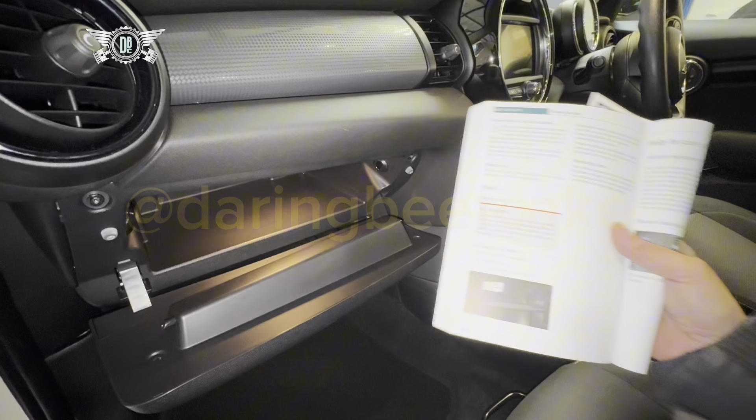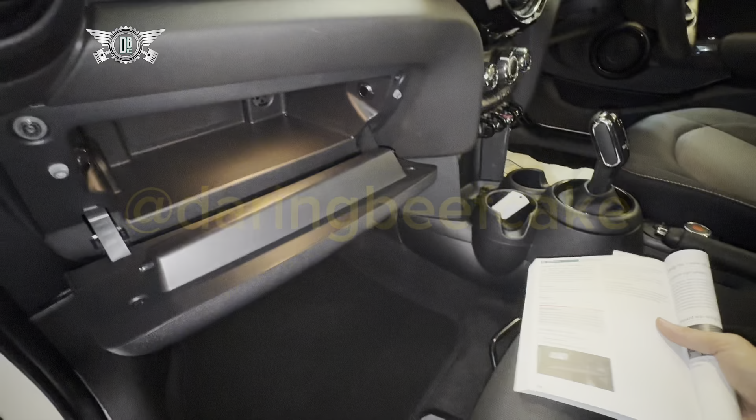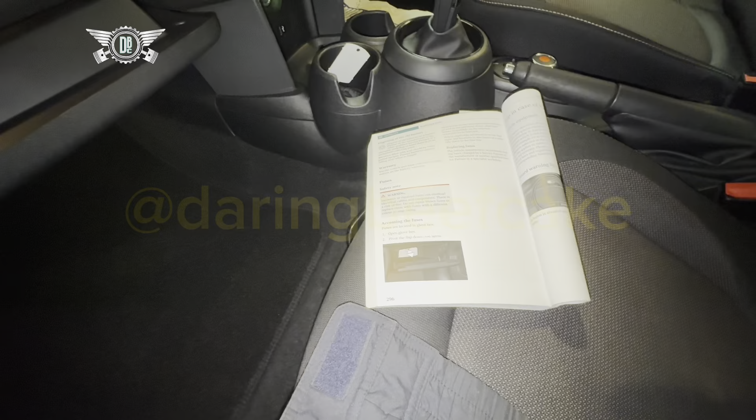In today's video I have this Mini Cooper, a 2019 version, the F56 chassis, F56/F57/F55 I think it is. I'm just going to show you the location of the fuses in this particular car. If you look at your manual, where it says fuses, in this case page 296. By the way, this is a petrol car, a 1.5 automatic, so it may be slightly different from the manual version, or the fuse allocations may be slightly different.

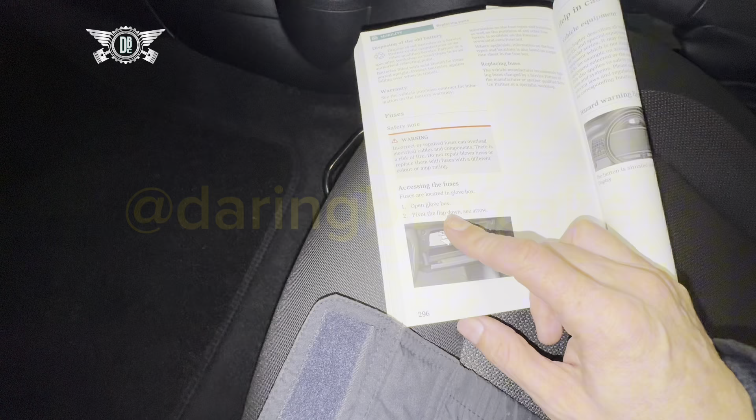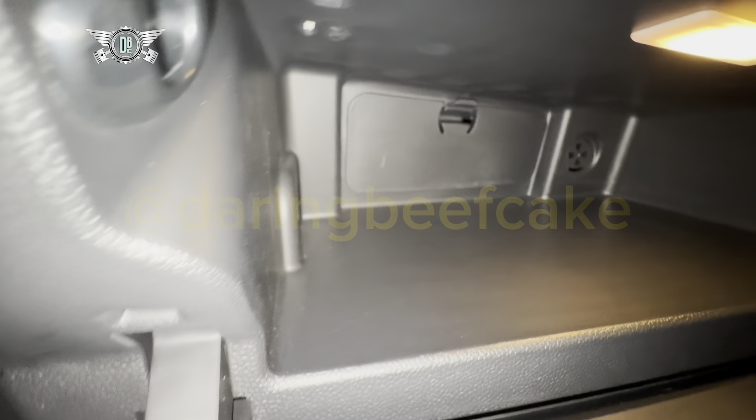So, accessing the fuses: they're located in the glove box. Open the glove box, pivot the flap down. So open the glove box, and there's the little flap. Take the flap out, the little cover, and in there are the fuses.

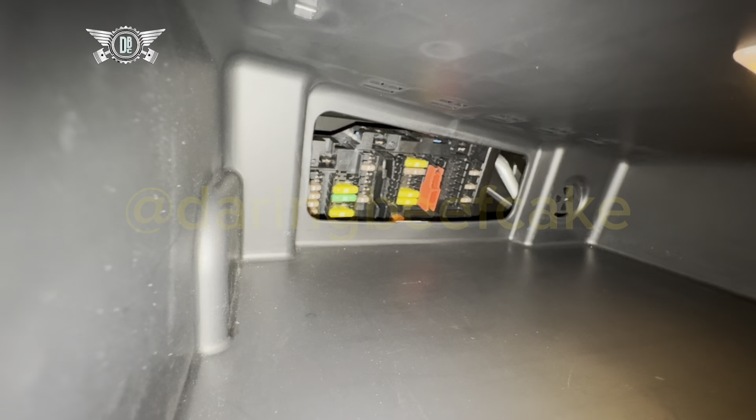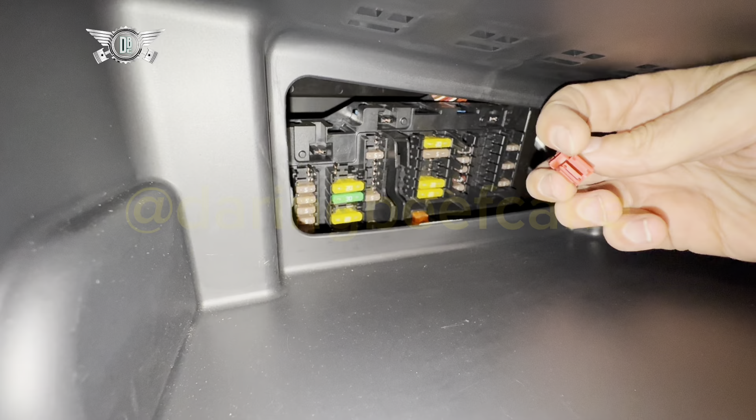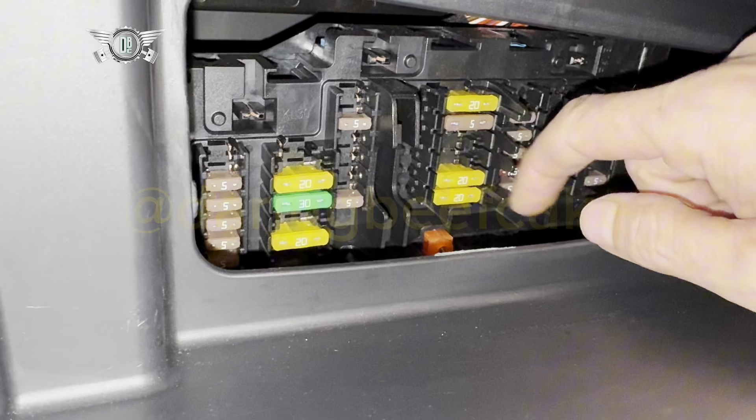And there's also that little key just here, which you can remove. You can use this to take fuses out. The small side here is for small fuses, and the other side is for the bigger fuses. So you have the bigger fuses here and the small ones here and here.

That's like an empty line there. There's some fuses that are not there as well, or here. Now that doesn't mean those fuses are missing, it just means that this car may not have those features. So if the car had electric seats, maybe there would be fuses here or whatever. So don't go putting fuses where there isn't any. It just depends on the car that you have, what fuses you may have.

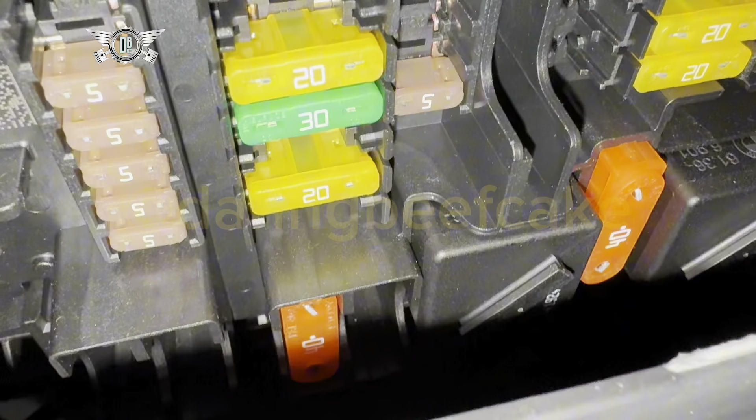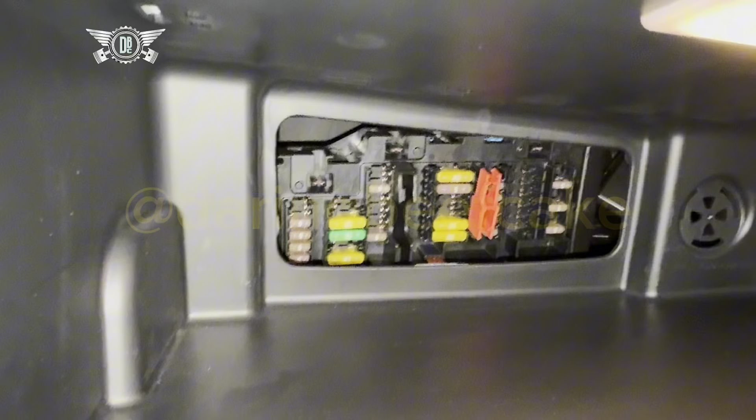There's also some relays down there, you may be able to see. So it's just one of those fuse boxes that BMW fits in the cars. A little bit awkward to get to, but it is what it is.

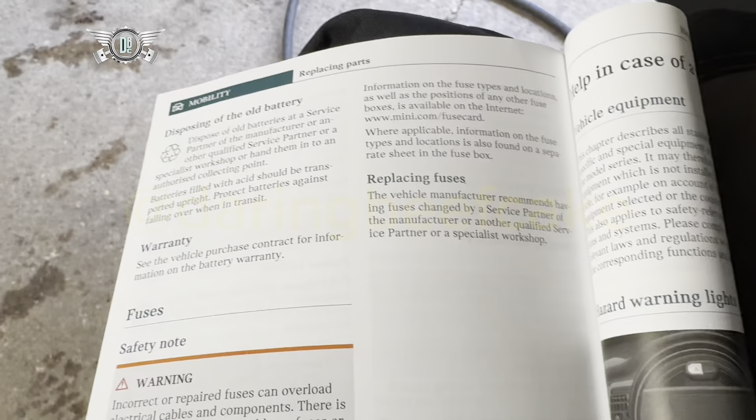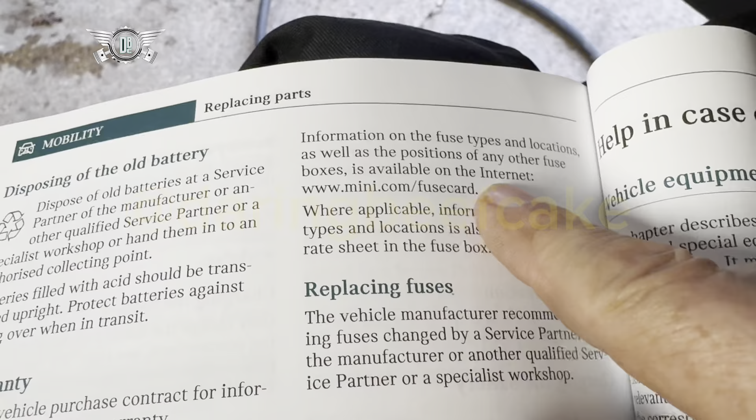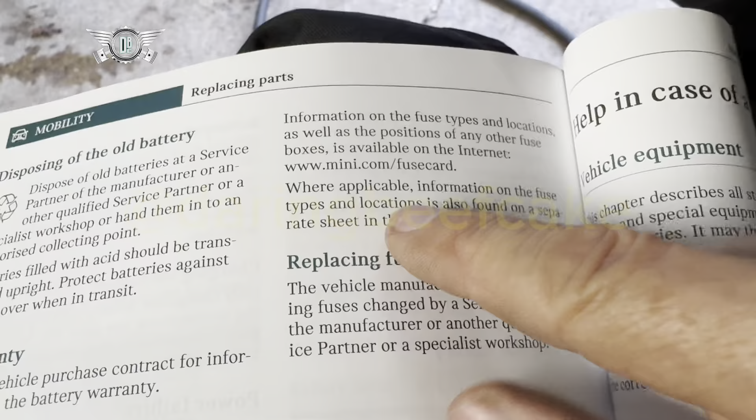And I'm not sure there is a fuse list paper somewhere, I'm gonna have a look. Right, so looking at the manual here, it says information on the fuse types and locations, as well as the position of any other fuse boxes, is available on the internet, at www.mini.com/fusecard. So I'm assuming you would go to that site and look for the Mini F56, and it will show you the fuse box, what the fuses are for, the allocations, the numbering, and the amperage. I'll have to have a look at that, and we'll add it to this video.

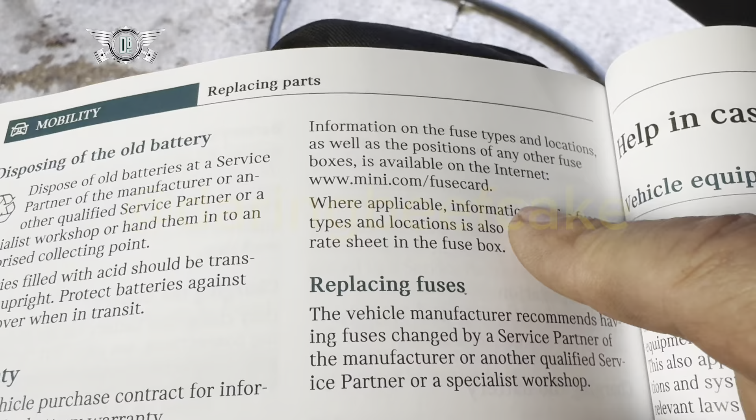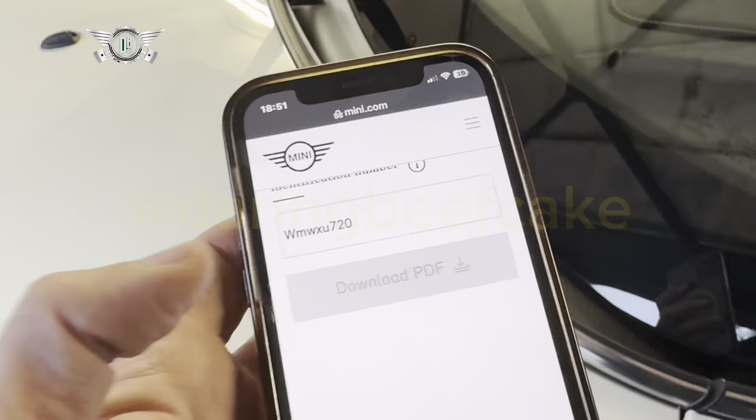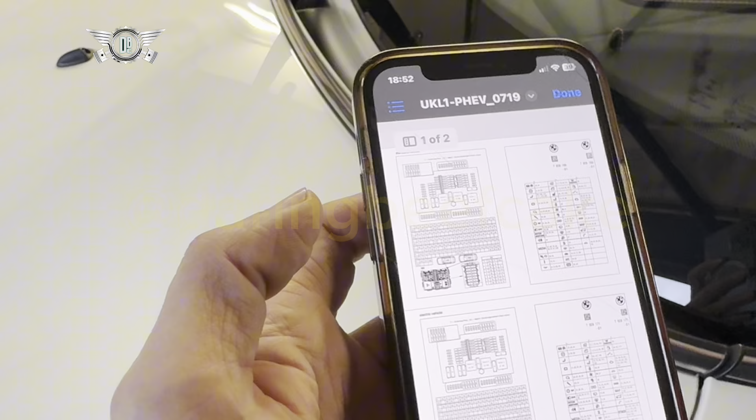Right, once you finish typing your VIN in there, it will say download PDF. So I've downloaded the PDF, it's down here, although it would be better to do this on a computer. I saved it to files, which are here. Right, it's here, okay, so it does open. So you can save it to your files and then open it there, and that's where it is.

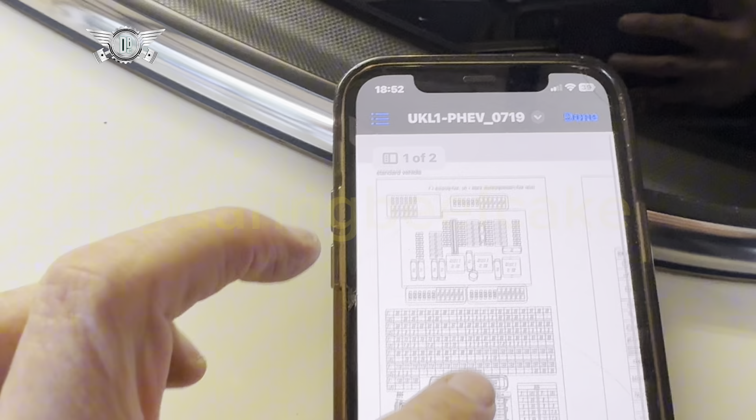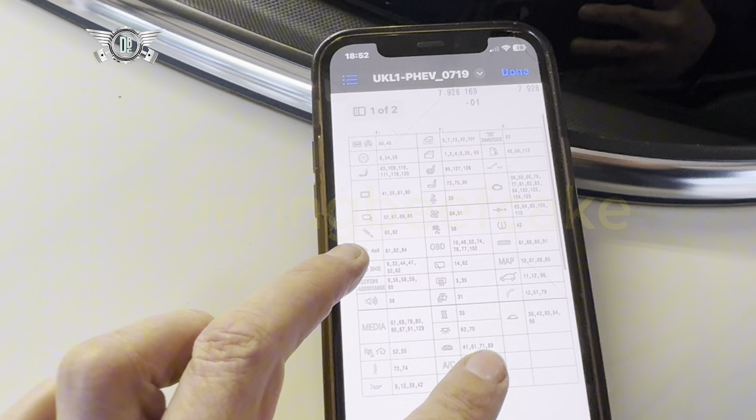Now it says here there are two fuse boxes in this diagram, but one is for the standard vehicle and the other one is for the electric vehicle. Now this car is not electric, so you would concentrate on the standard fuse box, and that's the card normally that you get in BMWs and whatnot.

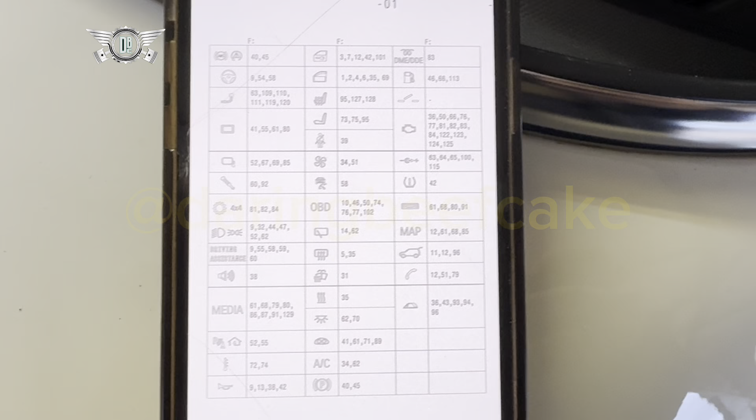It shows you a card like this, and it shows you what the fuses are for. So have a good look at that, although you can just download this yourself.

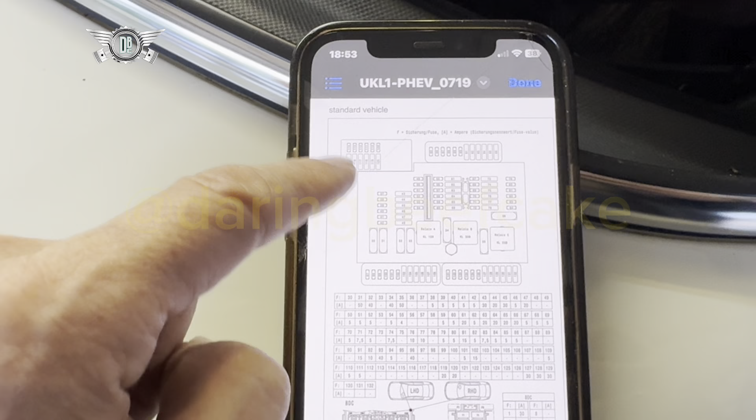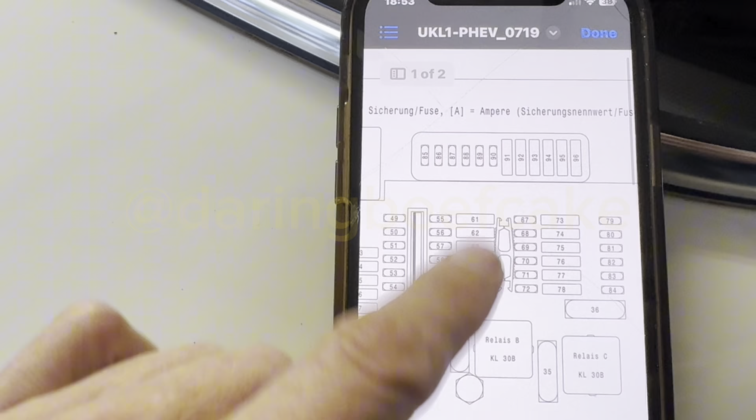Here it shows you the fuse box and the numbering of the fuses. You can see all the numbers: 43, 44, 45, 49 up here, 115, well 114, 120 and whatnot. Then these are the little fuses as well, so little fuses, big ones, little ones.

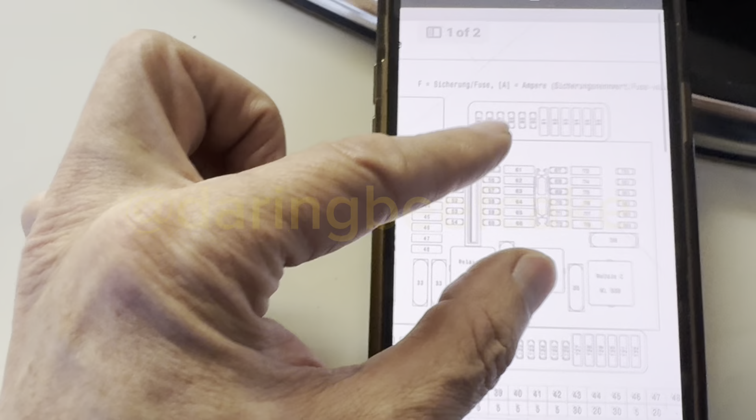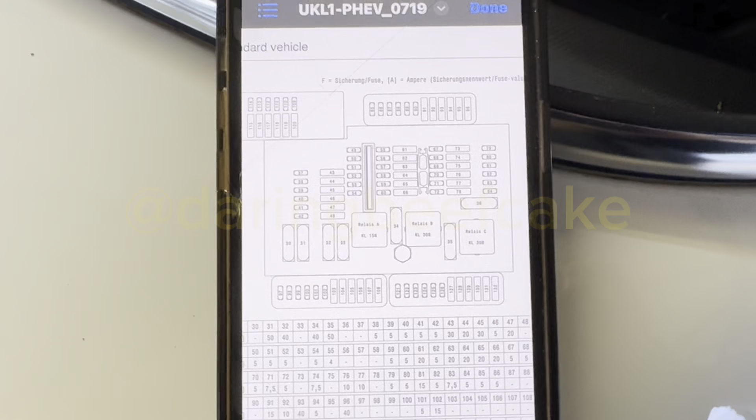There's a little red key for pulling the fuses, which more or less shows how this picture is shown. So the way you look at this picture is the way you look at your fuse box when you're looking at it from outside. And down here, this card is going to tell you the fuse number.

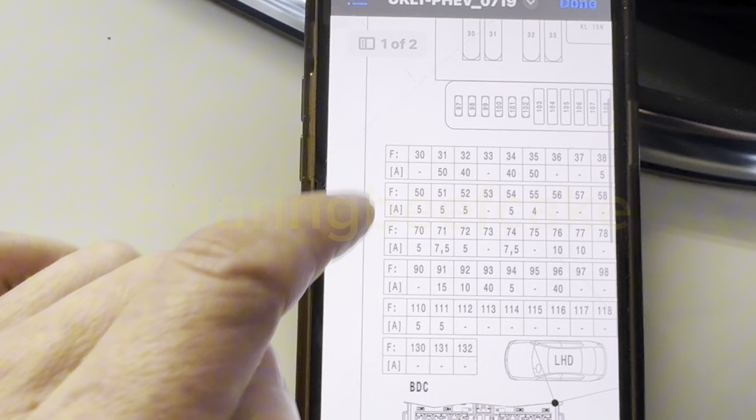So fuse 30 is not allocated, fuse 31 is a 50 amp fuse, fuse 32 is a 40 amp fuse, and all the ones that are blank have no allocation, like all of these here.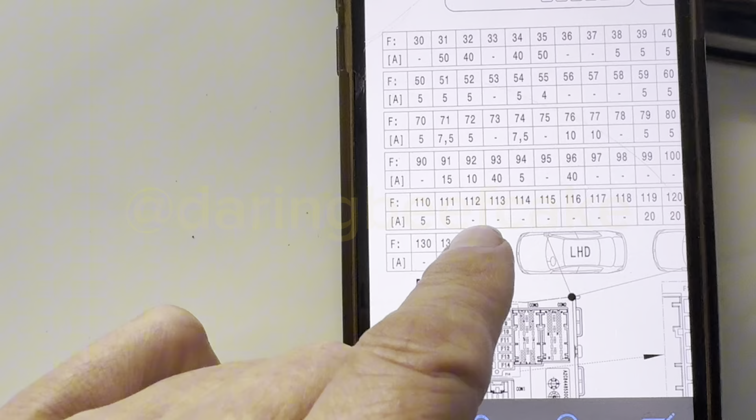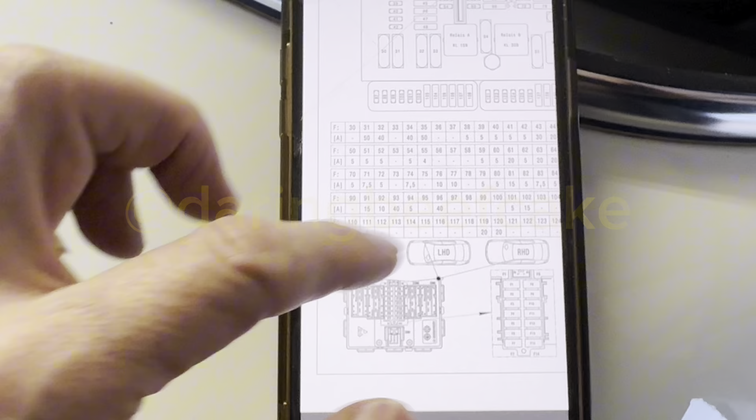Again, depending on what equipment you have, you will find your fuse boxes accordingly. That shows you a left-hand drive car and a right-hand drive car. So the one that I have here is right-hand drive, and well, that's our fuse box there.

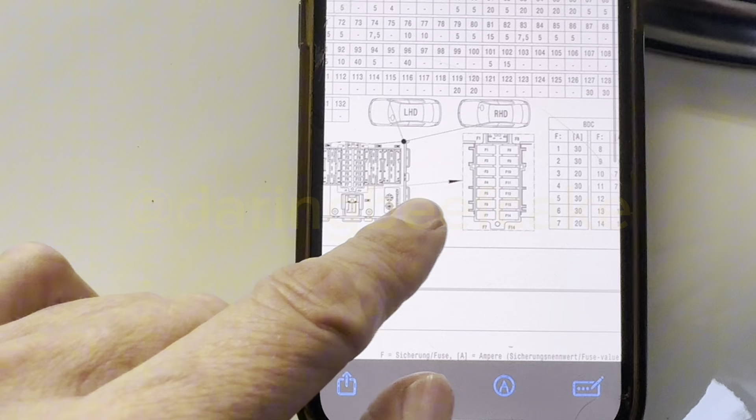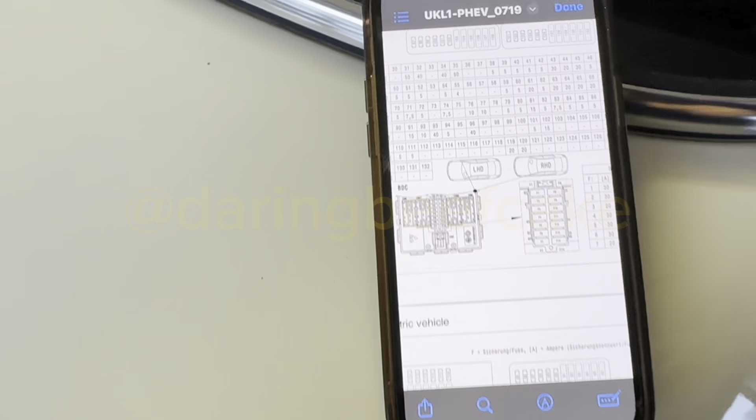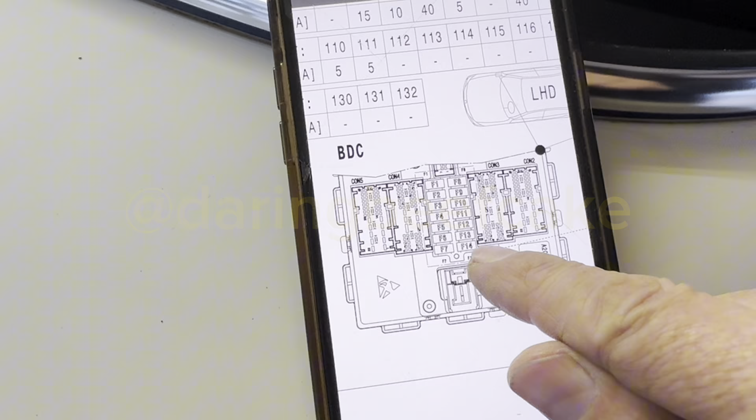Okay, so actually this here is another fuse box, one that I guess is hidden, and I'm going to show you where it is in a minute. I was getting a little bit confused, but you have fuse number 1 until fuse number 14 here in this box. I think this is like a body control module, something like that.

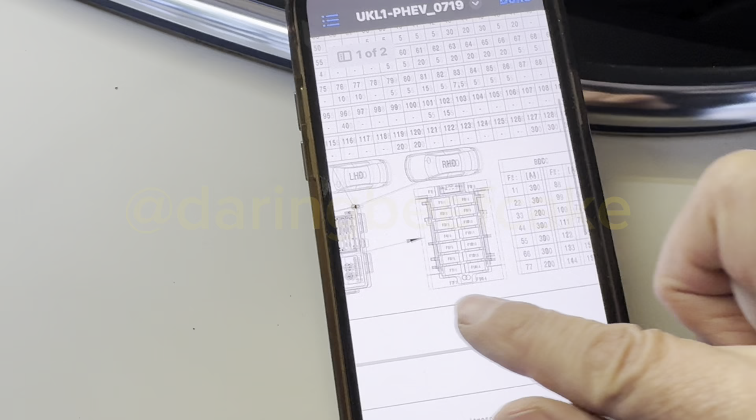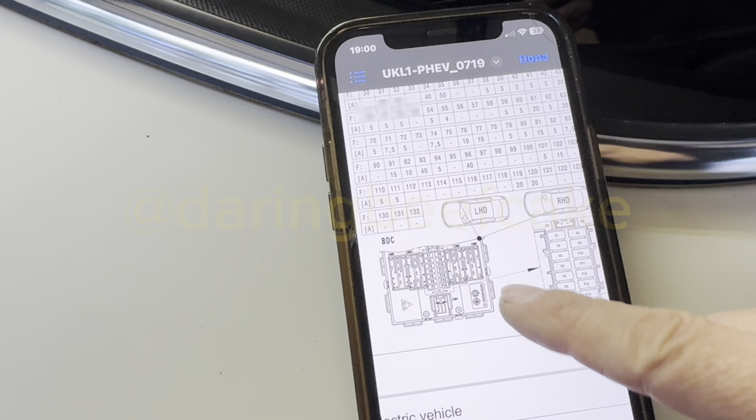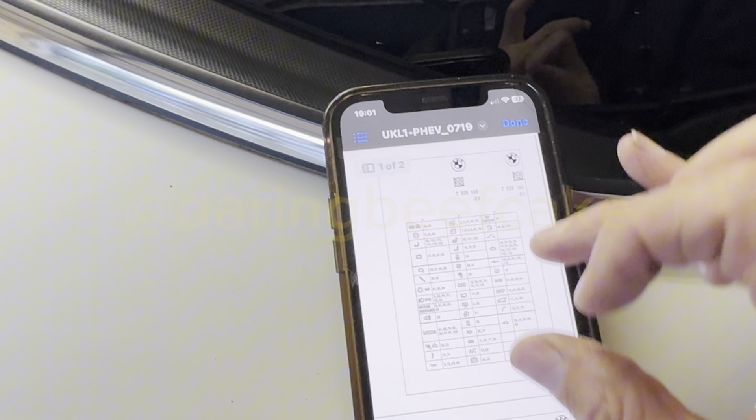So this is the main fuse box, the one behind the glove box, and this other one, which is not shown in the manual, I guess isn't really meant for most people to access, maybe more for trained garages and whatnot. But anyway, I'll show you where it is.

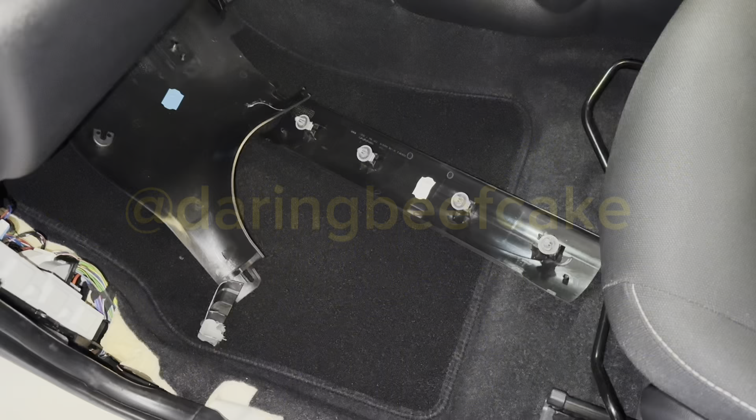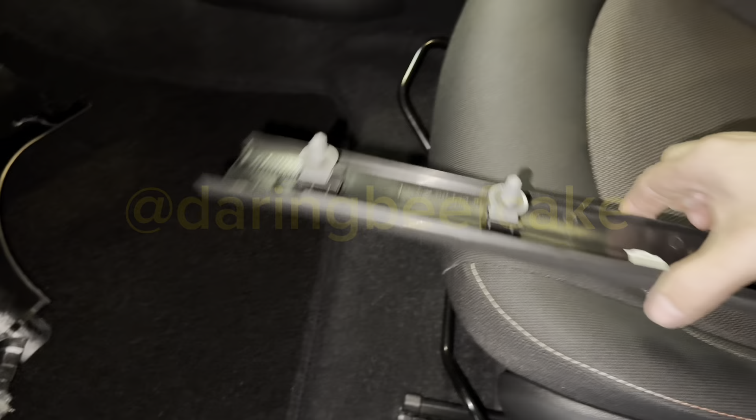And also I will show you what happened here. Right, okay, so you need to remove this panel here. That panel sort of unplugs, it's just plugged in. And often these things break when you take them out.

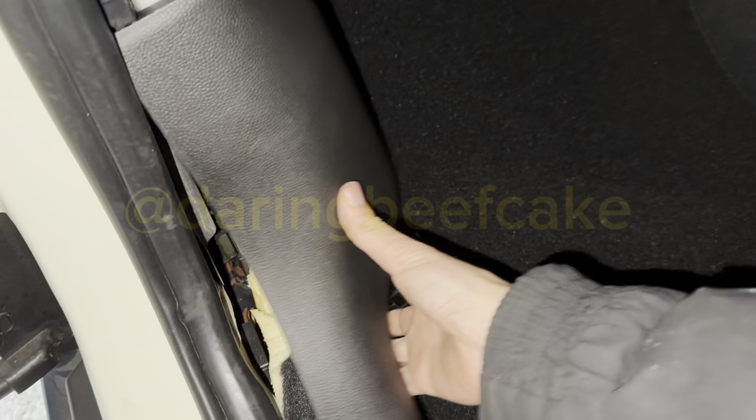Then you have this other panel. This panel is also plugged in here, like so, sitting up a little bit here, like that. So I removed it, I unplugged it from the bottom, from here. The little plug remained in there, that little button there, and the other one is actually broken.

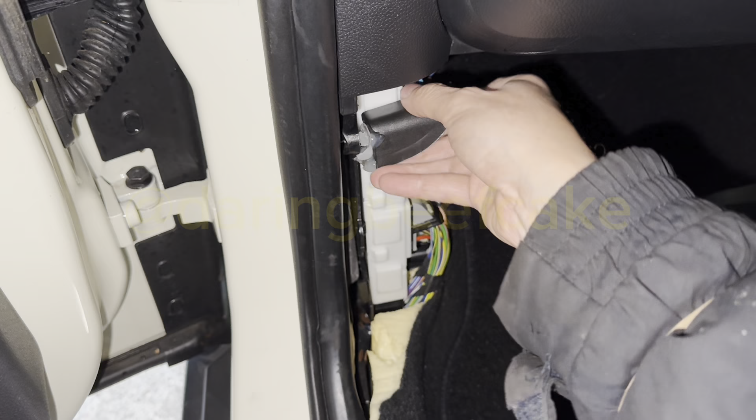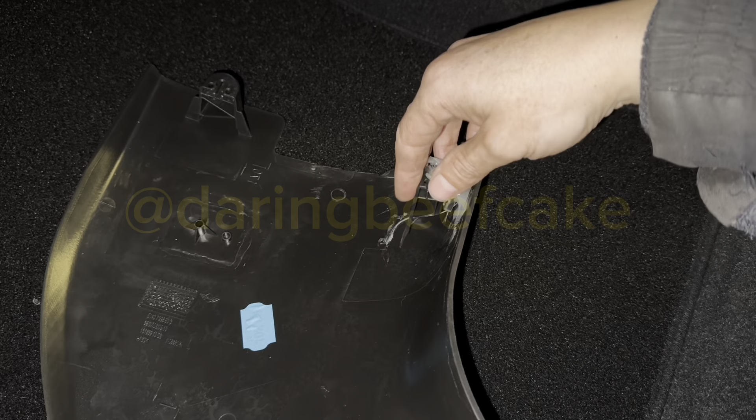And this thing here, as you can see, has a lot of glue. Somebody glued that in there. I don't think this is a MINI thing. So somebody glued that in there, and that part attaches there somehow, like that. That's how that was in there.

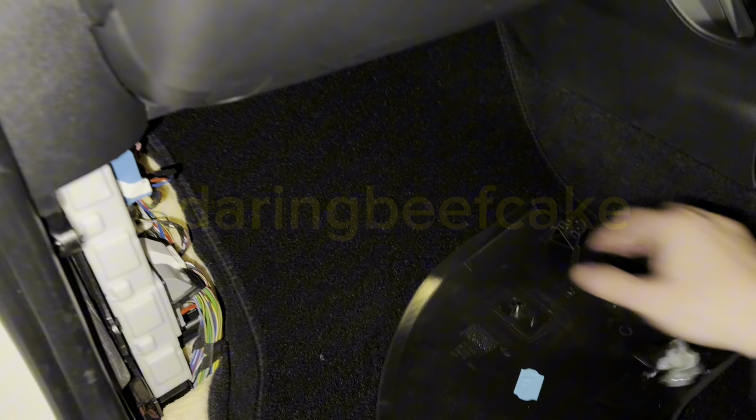So I'm guessing this bit here also plugs into this hole, but somebody must have removed it before and it broke, and then they glued it in there. So anyway, just giving you tips here, because if you remove it, bear in mind the whole thing might break apart, since these little things are so tight sometimes that when you remove them, the whole thing breaks. It's not really that good or efficient, but anyway, that's where the fuses are.